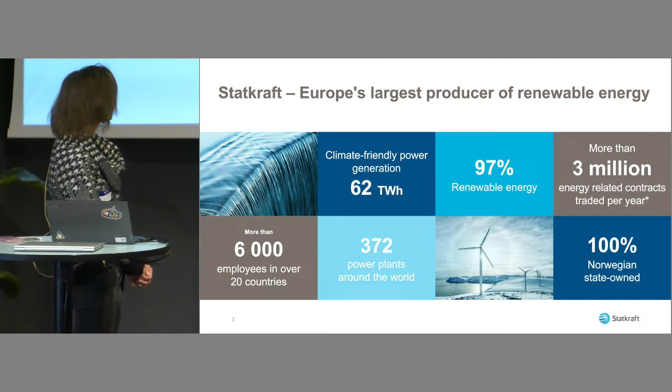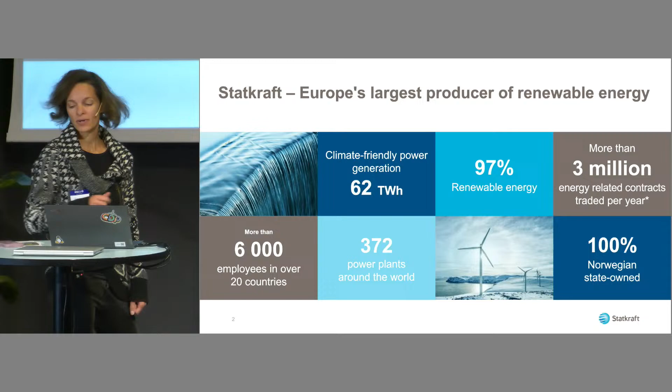So the focus in the past has been mainly in Europe, and there it's also hydropower, which is probably the dominant energy source, especially in the Nordics. There it's more or less just hydropower, some wind. But then more recently, there are efforts ongoing in South America and also in India. So the company has been growing quite a lot internationally recently as well.

So today I thought I would give a slightly different talk maybe to what we've heard before. I'm going to talk more about a journey that we've made at Statkraft towards what we call predictive maintenance. And I can warn you, we're not quite there yet. We're taking baby steps towards predictive maintenance. So the whole talk will be centered around challenges that we encountered, use cases that we have been looking into and that we have tried to scale up, and formulate in a more generic approach.

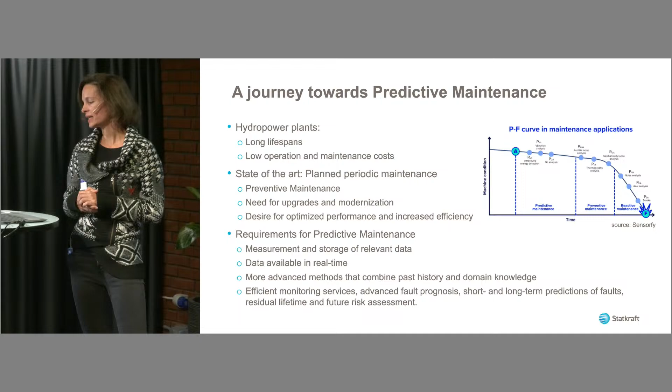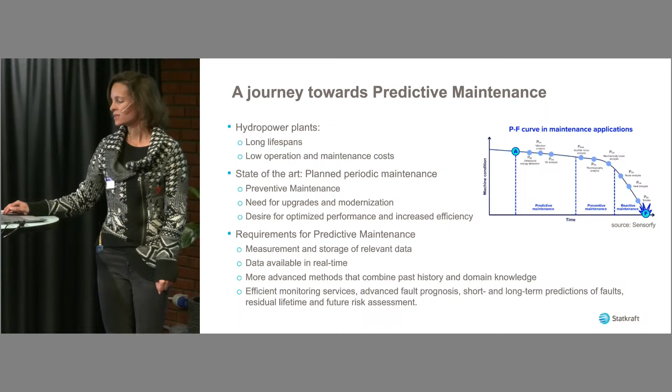So ideally, you want to not just show the data, but also leverage from it. You want to build advanced methods and combine domain knowledge and historic events that have happened. And you need to do that somewhere, so you need to build up monitoring services or platforms that aim at doing more advanced failure diagnostics, short and long-term predictions, and eventually you may be able to do residual lifetime investigations and future risk assessments. That's something the business side always asks for. So maybe the final state of such a platform could be that future risk assessment.

Benefits of condition monitoring, or using this along with predictive analytics, it's kind of similar, I would say. But the main benefits are to extend the asset life. By monitoring the components carefully, avoiding big failures, you can definitely extend the lifetime. Minimizing downtime, which happens due to unforeseen failures, for example, or also during scheduled maintenance when you realize something odd has happened and you need to also exchange another part of the equipment which you didn't plan for. Reducing O&M costs, that kind of makes sense.

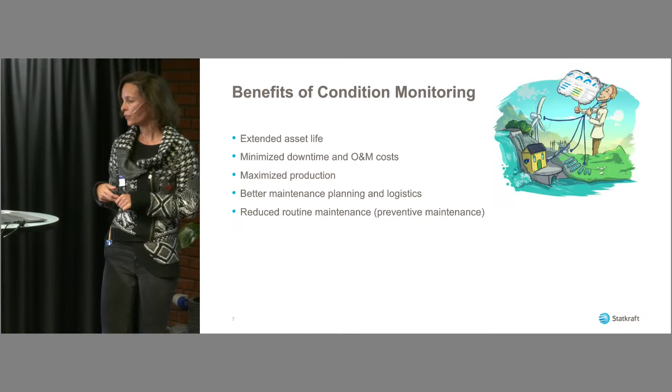Maximizing production in the sense that you can actually, through careful monitoring, also operate your machine in different regimes if you then know what you're doing and you're carefully monitoring. Yeah, I guess better maintenance, planning and logistics, and reducing the costs that are connected to regular inspections that you don't necessarily have to actually perform. They can be reduced.

Yeah, so when it comes to the more data-driven approaches and analytics in hydropower, we have encountered quite a few challenges that we didn't necessarily expect when we looked at the data for the first time. I'll try to sort of categorize them here a bit. By the way, this is a view of a power plant. I'll get to that on my next slide. But let's first talk a bit about the data and the analytics we want to do with it.

When it comes to failures in general in hydropower, these are not very common. So that's a bit of a dilemma if you want to train machine learning models on failures that you don't actually have. For the main components, there is barely any failures. I think over the last 10 years we have maybe had 10 bigger failures, nothing dramatic, but still way too little to actually do big failure statistics. Most of the failures that we do observe in the equipment happen in the auxiliary equipment, for example, pumps or the cooling system. So parts of the equipment that are not crucial and therefore don't necessarily have a lot of sensors with them.

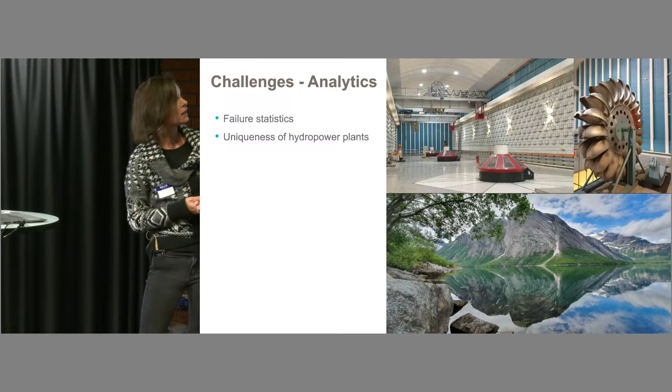The kind of reservoirs, the waterways the power plants are connected to, but then also the suppliers of the generators might differ, or even if you have a power plant that consists of 3 almost identical units, like shown in the picture on the left, you would expect them to behave very similar. Unfortunately, they don't.

Data quality, we all are aware of that, I hope.

There's one more thing that's maybe a bit more unique to the kind of data we're looking into. There is a lot of data that has been collected over time. Typically, over the last 20 years, people have collected sensor data from the plants. However, they have not really thought of it as to be used in analytics. It's been mostly collected for it to be collected. I find that a bit strange, but yeah, we sit on a lot of data and no one has ever looked at it or checked whether it's useful for analytics. So you hear there's a lot of data, you have great expectations, but then the data turns out to not be useful at all, due to many different reasons.

We don't necessarily have an information structure for all the sensors we're collecting. So when you want to scale up, and you have found a nice model for one failure mode and you want to implement that model in another power plant, it happens that you can't find the same sensors, because you don't have that information model built around all the sensors we have data for.

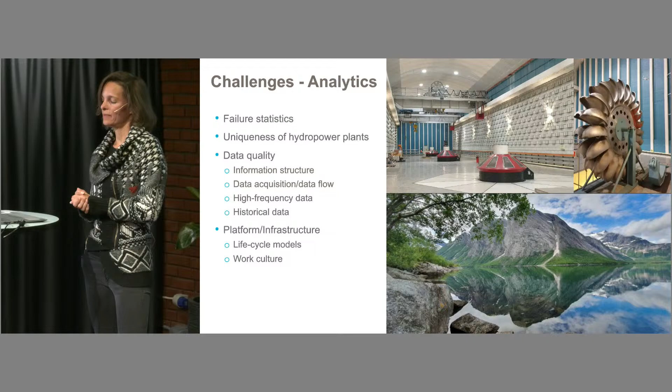The last point on this list is not necessarily, but a bit connected to analytics, I would say: the way people are used to working or have been working so far. This is not necessarily a data-driven environment, because people are more used to walking around in the plants, listening to the equipment, touching it, feeling the vibrations, and having a very close connection to the plant itself, but not necessarily looking at it from a data perspective. So when it comes to implementation of more advanced models, they can be a bit reluctant, it's not in their mindset, so you have to convince them, build up trust, communicate around that, and make those algorithms accessible for them, so they can build up a new kind of relationship, a new way they work. You're building a product for them in the end, so it's kind of important that they want to integrate it into their way of working.

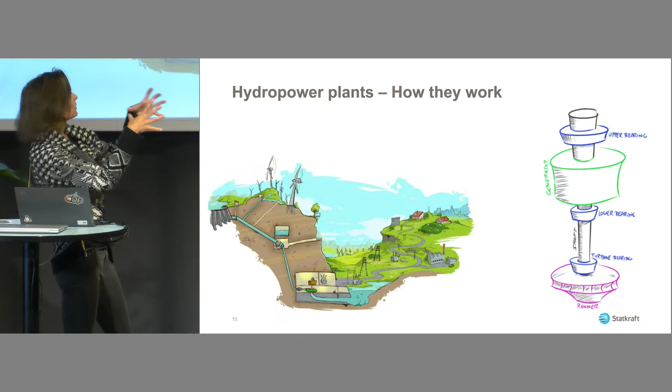You typically have a vertical construction with a turbine at the bottom that spins as the water falls onto it. It rotates the shaft, which you see here. Further up, you have the generator, which is rotated by the rotating shaft. The inner part of the generator, the so-called rotor, is spinning as well. In the outer part of the generator, the so-called stator, you produce a magnetic field and currents, and through that, eventually, electricity.

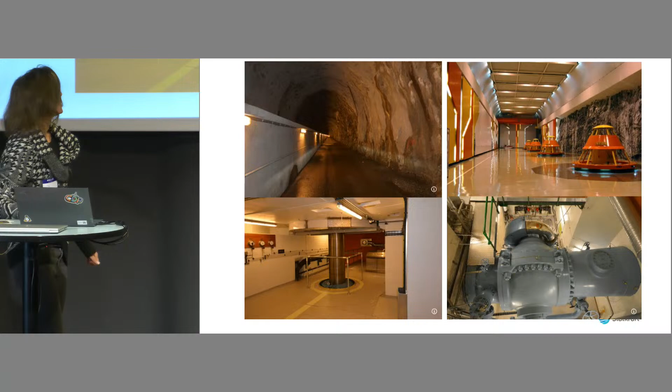These are a few impressions of what it looks like in a typical mountain power plant in Norway. Usually you drive into very long tunnels, several hundred meters long, and towards the end you reach the so-called machine hall, which is the uppermost level of the hydropower plant.

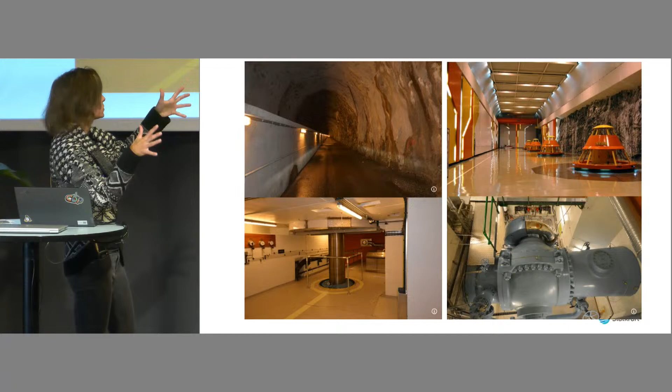Here you see a power plant with 4 almost identical units. These are like the tops of the generators, at the very top of the construction. When you go down, it's almost like a huge building inside the mountain, several stories high, and walking down the stairs you get to the different floors with the generator, the shaft, and the main inlet valve where the water comes flowing into the power plant. You also see this valve moving, opening and closing, letting the water into the plant.

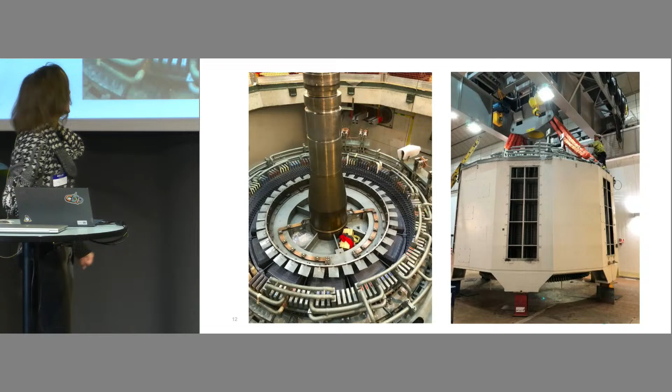This is an image of a generator that has been taken out of operation, and this is the inner part of the generator. I would call this the heart of the energy production. This is the rotor that spins. It's super cool to look at these for real - they're massive constructions, around 300 tons.

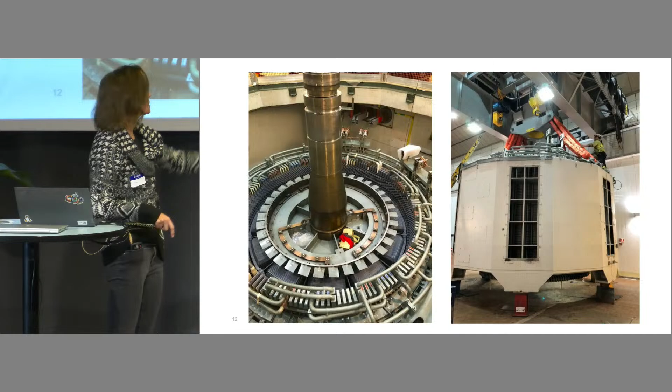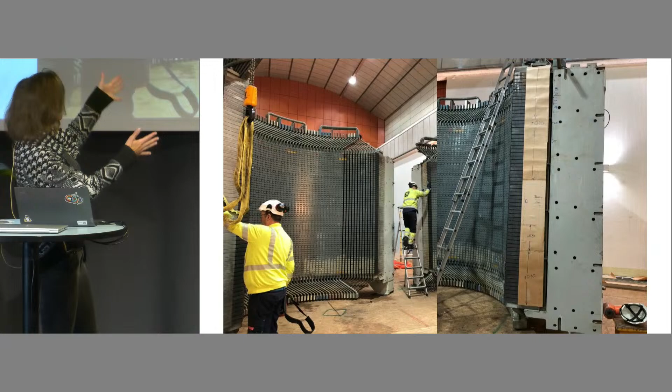This is maybe 200 tons, and this is another 100 tons - huge constructions that don't usually come in one piece. This stator construction, when you open it up, looks like this. These are the stator bars, where the magnetic field and electricity are produced. The stator bars are kind of crucial here.

This is also an example of one of our first use cases, which I'll present, and then a couple more. Here they actually had a failure - a small stator bar smoke development, maybe fire - and they had to open up this stator to investigate the root cause. That caused a long downtime, which gave us the chance to step in and do some analytics. It takes around 2 years to replace a component like this, so they basically had the choice to not run it for 2 years or take it back into operation and run it with a lot of monitoring on top, which is what they decided to do.

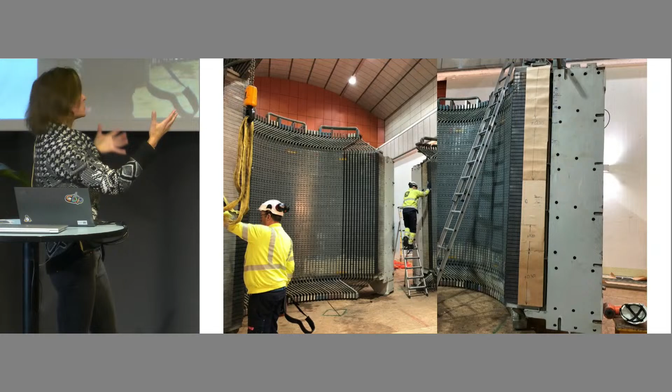So this unit was equipped with a whole bunch of sensors along these so-called core joints - the places where the stator is bolted together. It comes in 2 or sometimes 3 parts. Those are the most sensitive parts when it comes to vibrations and maybe also temperature increase when something is wrong, and a lot of deformation can potentially happen in those places where the unit is bolted together.

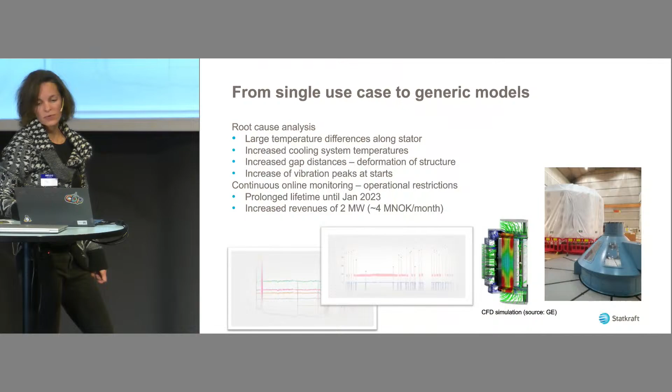This is kind of where we started with one, and later on several, of our use cases, adding additional sensors to the already existing ones, then carefully monitoring these sensors, first with more simple models, but then making them more and more generic so we could roll the same kind of model out to other units and other power plants. This was quite beneficial - a mutual benefit both for the business and for our task force for advanced analytics, as we called it back then.

By carefully monitoring the sensors when the unit was put back into operation, we could give hints to the root cause, helping with the root cause analysis, which was connected to deformation along these core joints. That was also due to the cooling system not working as efficiently as it should have, leading to increased temperatures at the top and bottom of the stator, as indicated in the CFD simulation here. So there were a lot of things we could help them pinpoint and closely monitor over time.

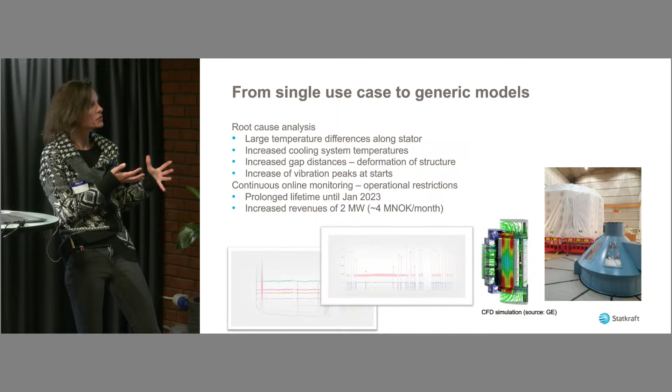So we would eventually build a platform around these models, but we first started with very generic approaches like monitoring vibration peaks, monitoring differences in temperatures, and monitoring trends on vibration peaks, and so on - building this up step by step, also in very close cooperation with the people at site.

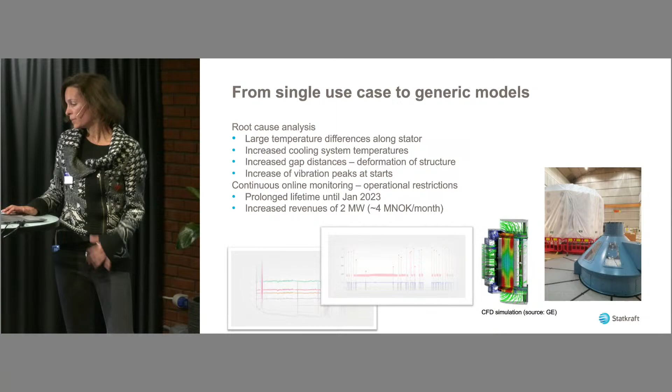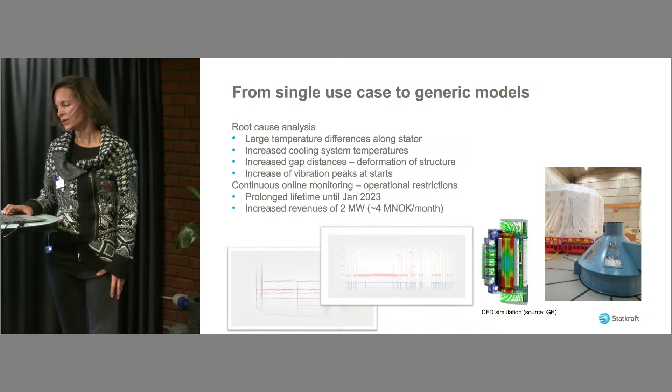In this particular example, we were able to keep the unit alive for another 5 years. There was a new generator waiting to be installed in the meantime - you see it on the right picture there. But since this monitoring went on so well, and the energy prices were so high during the last couple of years, it was worth it for them to wait, and we could basically run the unit to the end of its lifetime.

Let's continue with another use case, a bit more of an R&D kind of project that we followed up on, connected to audio analytics, sound. Why did we decide to look into sound? There's several reasons why this could be relevant for hydropower.

Some of the smaller power plants, for example, are not usually staffed, and sometimes they are hard to reach. So having a small installation there where you can basically just listen into the sound was considered very useful from the maintenance team side.

Also, while working together with the technicians and maintenance teams, we noticed that they go in and listen to the plants, and they do hear when something is off. They would point us to a unit that is different from another unit. That's kind of how we came up with the idea, and then we tried to understand whether this is useful for making predictions as well.

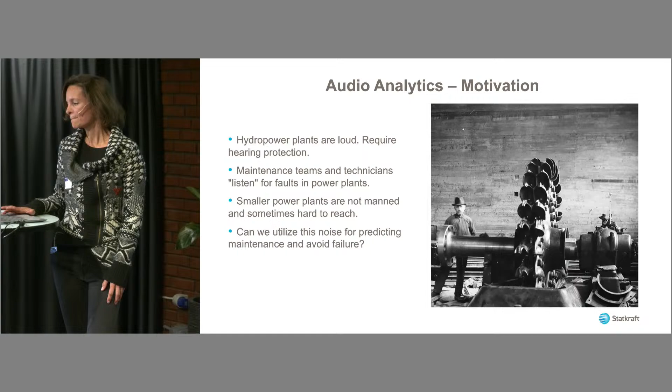Maybe one other motivation is some places that you really cannot get to easily. I think the pictures are quite convincing. This is not a power plant, this is a water intake area up in the mountains. It's called the window, and it's actually the water intake of one of the big glaciers in Norway.

Places like this are only reachable by helicopters. When they built this, back in the days, that's how it looked like on the picture on the right. This must have been quite a hassle, and they don't really have any kind of monitoring up there in the mountains, so that would also be a nice use case.

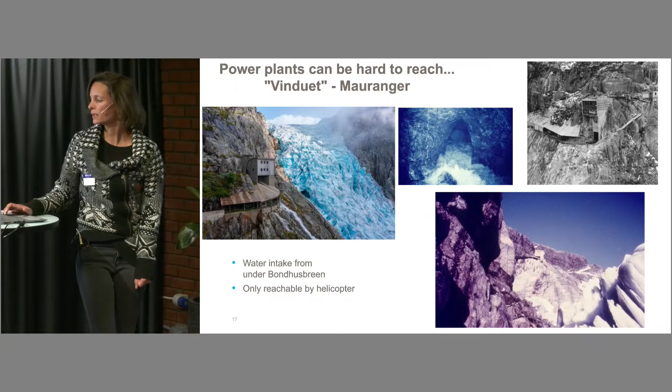We didn't go there. We were not allowed to take a helicopter and get to these nice places, but I should change the order of this slide. I'll come back to that, I'm sorry.

We went to another power plant up in northern Norway. It's also a kind of special one because it basically shuts down during winter due to the snow. You cannot get there by car during winter, so they take a snowmobile to get there. Their wish was also to have some kind of installation to basically just listen in.

Not to do necessarily fancy analytics, which is something we tried in another project, but just to be able to listen in during winter because there's no one there. Which is also nice if you think about surrounding noise, which could potentially disturb your recordings. In those power plants, no one is disturbing you during winter.

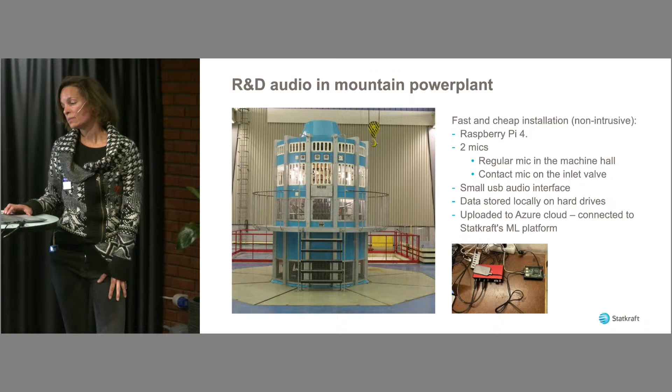So what we did here, we put up a small device, a Raspberry Pi, connected it with 2 microphones. I'll show you on the next slide how that looks like. Set up a small audio interface. We stored the data first on a local hard drive. Then, since we had good enough internet connection, we pushed the data to the cloud, and from there transferred it back into our machine learning platform. I'll also come to that.

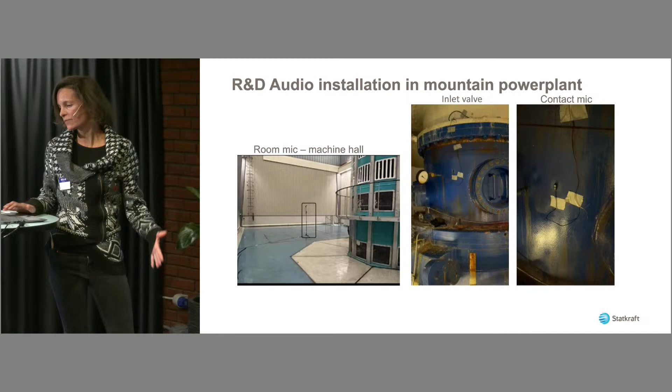This is our super quick and cheap installation. If you remember the previous slides where they actually had to open up a stator and install sensors, taking the unit out of operation for several months, this installation takes an hour. It's a very non-invasive method of just going there and getting some quick information on a place you don't get to easily, or you don't usually have staff there working throughout the year.

In this particular example, we can now listen into a start, and maybe this even works. It's kind of nice to listen in.

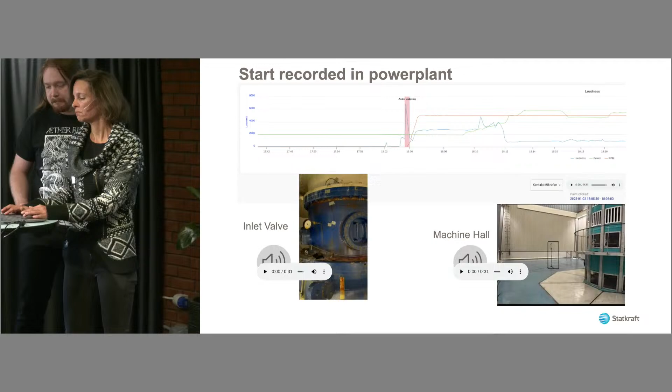I don't really see my mouse right now. Nope. It was there for a second. It's there again. Try spacebar. No, see if I can. No. Can I try? Yep.

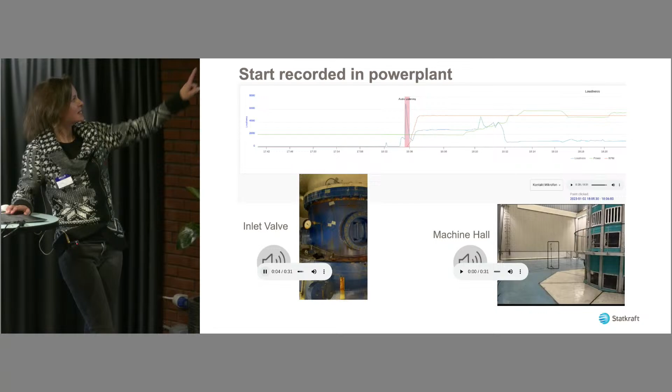Thank you. Let's just listen into that one. So this is now the sensor which we put onto the main inlet valve, the picture on the left.

And they're opening the main inlet valve. And the water comes flowing in. And now you also hear the unit spinning and the water running.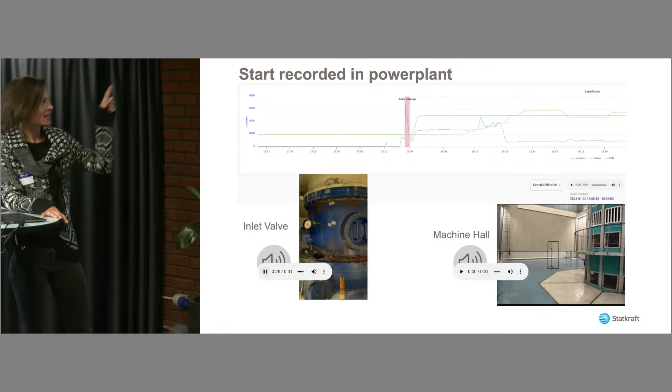This is actually a contact microphone. This is something we also learned when we played around with different microphones. Contact microphones are quite nice when it comes to listening in, and at the same time having something that is undisturbed by the other units.

Earlier we had a project where we put up microphones in the machine hall, and it was several units running - sometimes at the same time, sometimes only one unit running, sometimes two units running - and we were struggling a lot with just distinguishing the sound from the different units.

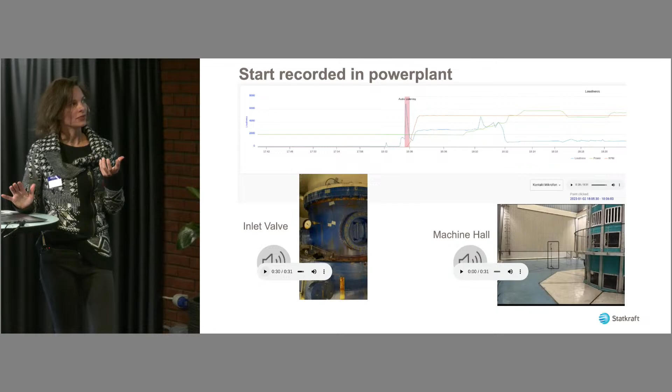With a contact mic, or first with a single unit, it becomes much easier. You don't have a lot of neighboring sounds. We don't have different units. But with a contact mic, you don't necessarily catch the noise of all the auxiliary equipment. You're very close to the actual source of the sound.

So we found these types of microphones to be very useful when it comes to monitoring something that's closer to a vibration signal, but you could still listen in, as we just did in the sample I showed.

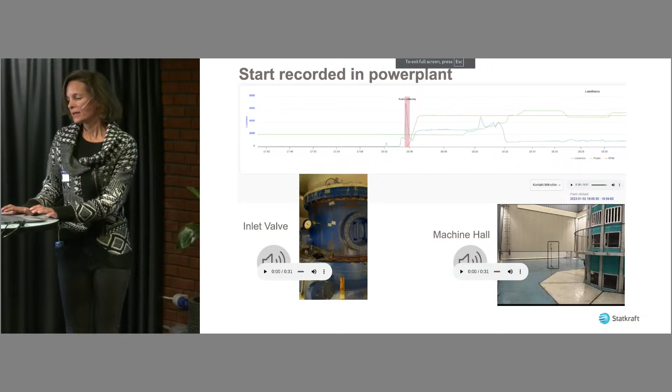Let me see if I can go back to my other slides. Okay, and now I just briefly wanted to go back here. In a more industrial-like setting, we have worked together with Expert Analytics on a more prototype-like version of this approach, which I think they have now turned into a product, which they also call Edge Audio Analytics.

So we tried to also follow up on whether we could listen into changes over time. This installation lived for quite a while, and we found quite a lot of interesting features in the audio profiles. The way we worked with the data was that we did the processing and the training on edge at site.

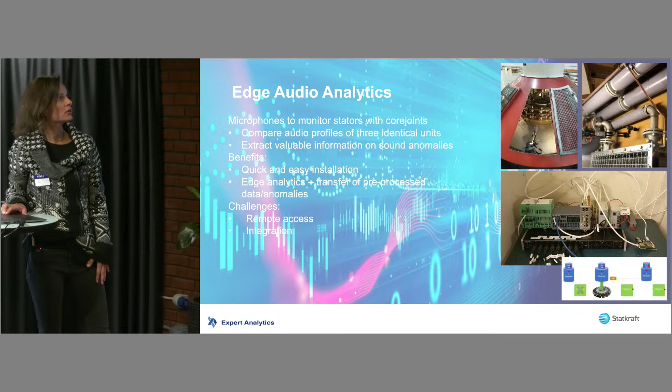Okay, I think I'll go back here. Yeah, and now I come to the last series of slides. This is actually the platform that we have built around the use cases. I'll show one more after that, I think.

Coming back to the idea of why we're doing this and what we're trying to achieve here, we're actually trying to make this useful for someone else. This is not what we're using for us, not as data scientists, not as developers, but we're actually building this for discipline experts, maintenance teams, technicians who are working in the power plants, who want to understand if something is off or happening to the equipment.

In that case, sensors on some failing equipment maybe. So we want to help them, and we want to make this intuitive for them. And they don't necessarily want to know the details of our machine learning models either. They want to know if something is wrong or not.

So in this approach, we try to combine a machine learning platform with a dashboard solution, because that's kind of what they want to see. They want to pull up a dashboard, which is hopefully even pre-built, so they don't need to interact a lot. And they want to see if something is off.

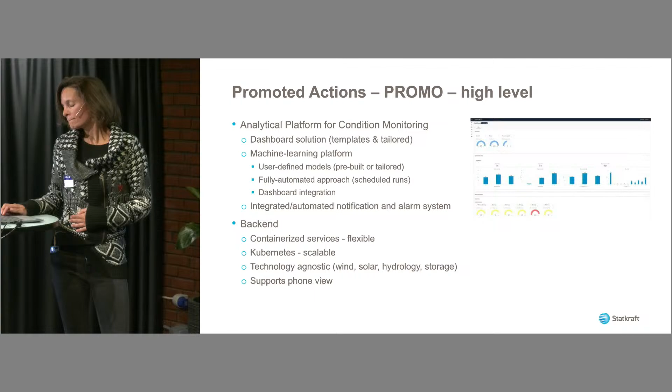The backend that we built, as I said earlier, is an in-house development, so we have full control of the whole package. We have containerized all the services that are running in the background. We're moving the platform right now to Kubernetes. This will be relevant for the scaling.

We're rolling these dashboards now out across the entire hydropower fleet. That's around 200 rotating units for the hydropower part that we have been looking into. But it's also a platform that's built in a technology agnostic way, so we're using this also for wind parks at the moment, especially the models, because there's even way more data for the wind parks. And they are struggling with organizing the data in a nice, comprehensive way. I think our dashboards are quite useful for them as well.

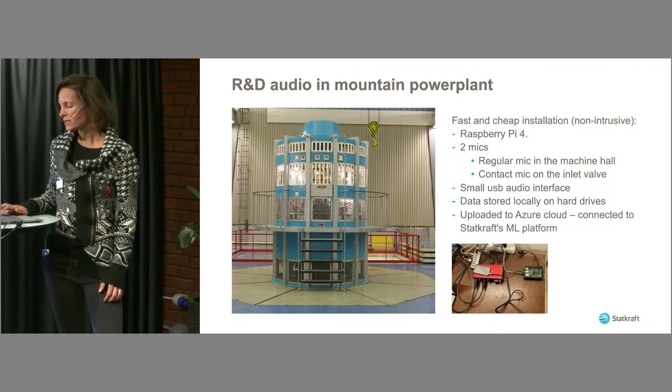He walks around with his tablet, and at the same time he goes and checks on the sensor, which has maybe just triggered a threshold. So that's kind of how we envision them to work also with the kind of results from the models that we provide.

Okay, do I have more time? You have 7 more. Great.

So then I'll just briefly comment on, give a bit more detail on the kind of models that have proven quite valuable so far. Some of these are generic and work for all kinds of technologies, I would say. Some of them are more tailored towards specific technologies. We have some machine learning models here as well.

This would be maybe one last use case that we have, I would say, kind of solved with our health model. It was a thrust-bearing failure that occurred in one of the big plants up in the north. When they had this failure and disassembled everything, they put in additional sensors and took it back into operation. It takes a while, several months, if you have these rather bad failures.

But the nice thing with these additional sensors was that we now had a comprehensive data set that we could actually use to train our health model, which we did. In order to prevent the same kind of failure, we started monitoring all the sensors along the shaft, including all the thrust-bearing sensors, with the kind of health model I showed before.

After a few weeks of training and making predictions, that model triggered again. It triggered pretty much 4 weeks before any of the alarms in the so-called SCADA system. That's the system that the dispatch centers are handling - it shuts the plant on or off if something strange happens, but it's a threshold-based system. It's very crude for analytics, so we don't work with that system.